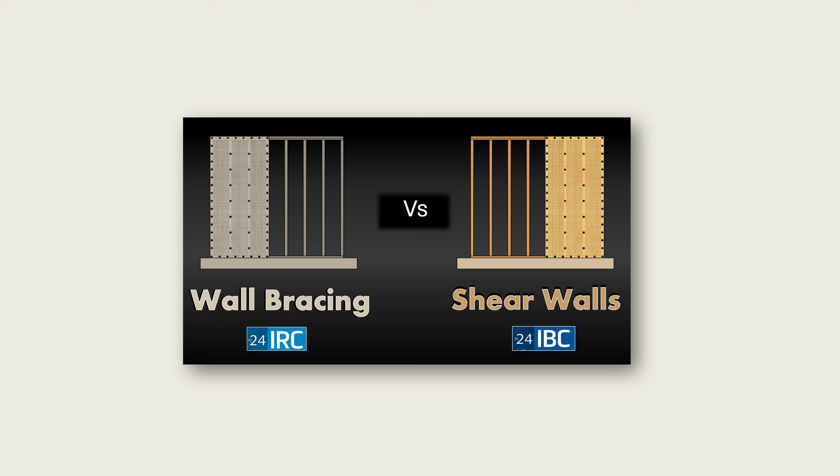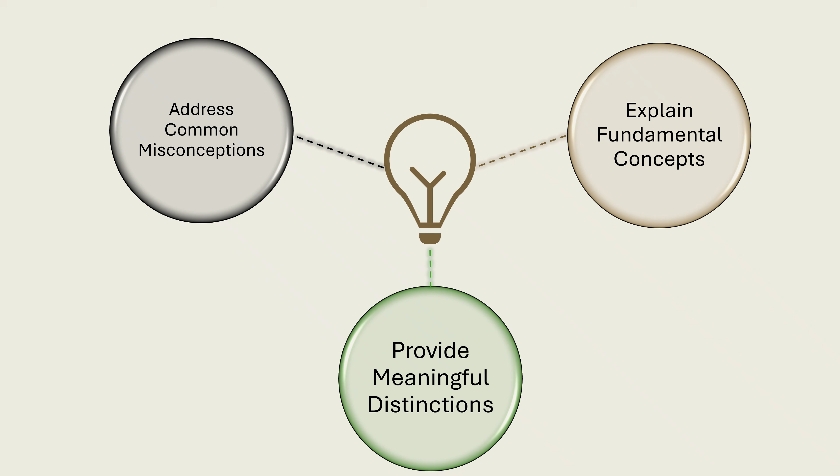This video is a thoughtful expansion on our previous video on wall bracing versus shear walls, which has received insightful feedback and important questions from viewers, highlighting the need for a more comprehensive explanation crafted to reach a wider audience. Our goal is to revisit the topic and approach it in a more accessible way, addressing common misconceptions, explaining fundamental concepts, and providing meaningful distinctions between braced walls and shear walls, both in principle and in application.

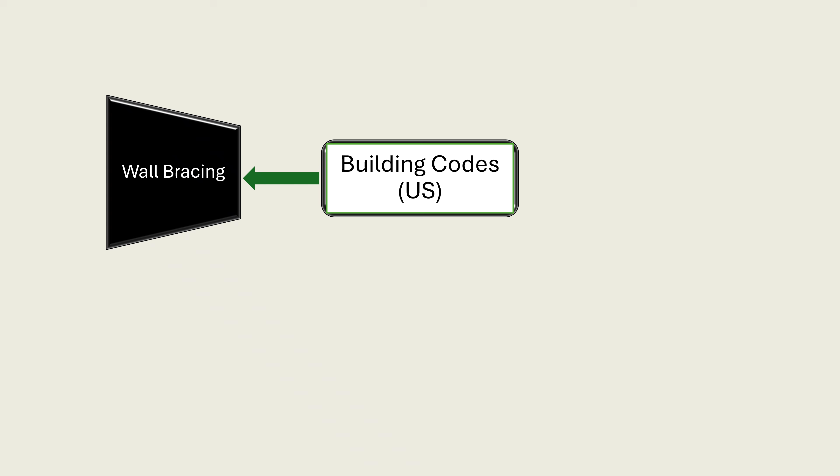In modern building codes adopted in most U.S. jurisdictions, the term wall bracing is almost exclusively used in light frame wood construction. However, the term shear wall is used for light frame wood construction, cold-formed steel, concrete, and masonry construction. Since it would not make sense to compare light frame wood-braced walls with concrete shear walls, we will restrict our discussion to light frame wood construction.

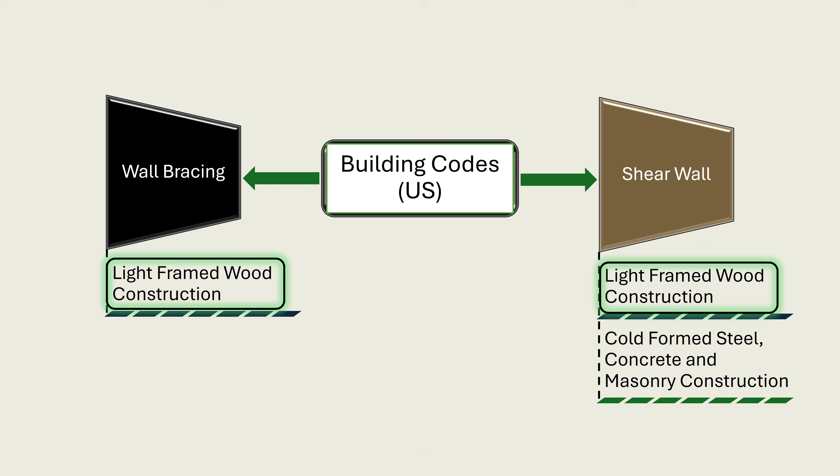The design of any residential structure begins with the architectural layout of the floor and the roof. The structural design is built on the architectural layout and is intended to provide the means by which framing members will resist the loads that they will be exposed to. For a typical residential structure, these loads may be broadly classified into two groups.

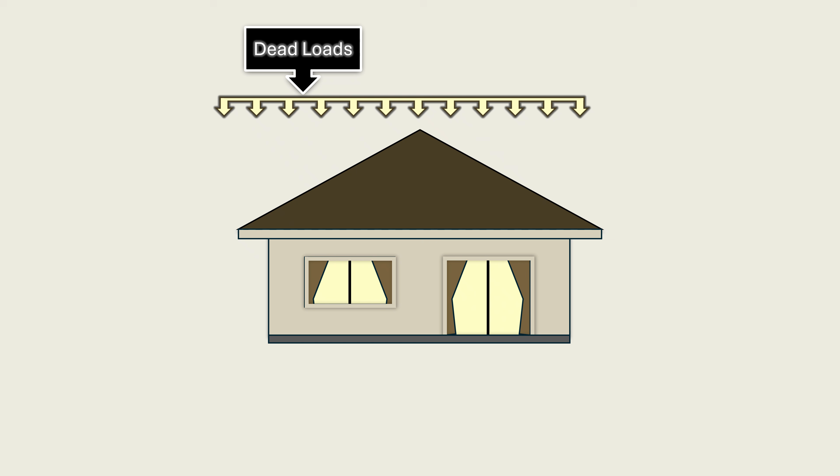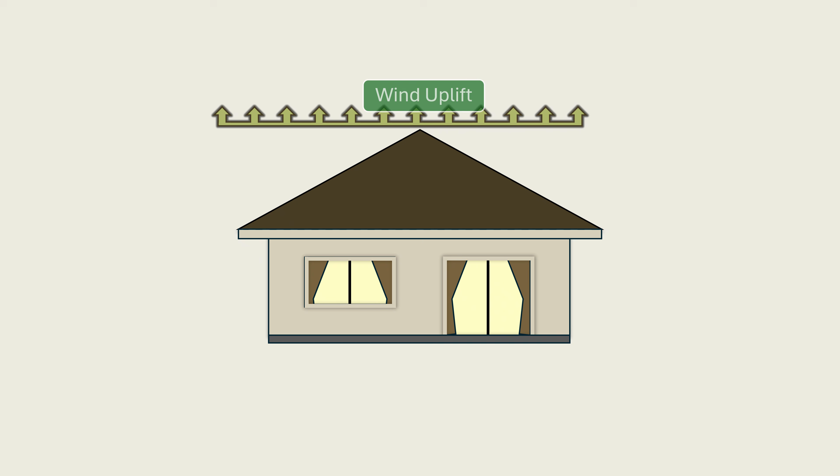The first group consists of vertical loads. These are loads that act primarily vertically downwards. Typical vertical loads include dead loads, which is the weight of the building materials, and live loads, which is the weight of the occupants, furniture, and other non-permanent elements in a building. Other vertical loads include wind uplift loads, which act vertically upwards and develop at the roof when internal pressures are higher than external pressures.

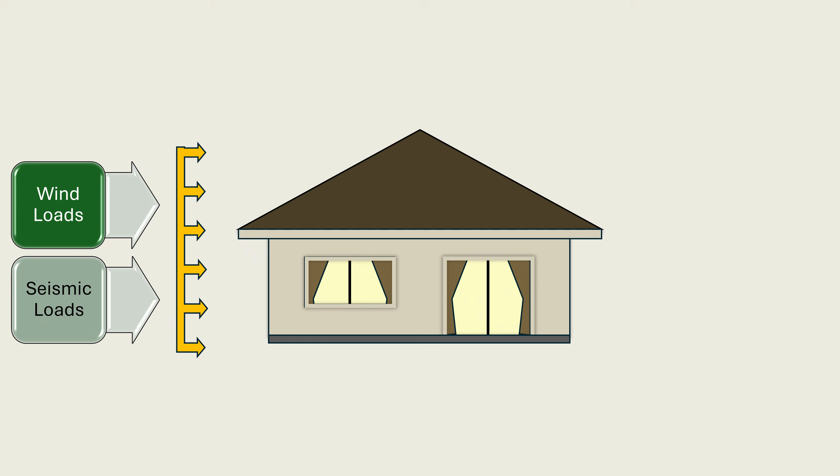The second group are lateral loads. These are loads that act laterally on a building and include seismic loads and wind loads. Other lateral loads include soil loads, which are resisted by retaining walls. As we shall see, both shear walls and braced walls are used to resist lateral loads such as seismic loads and wind loads.

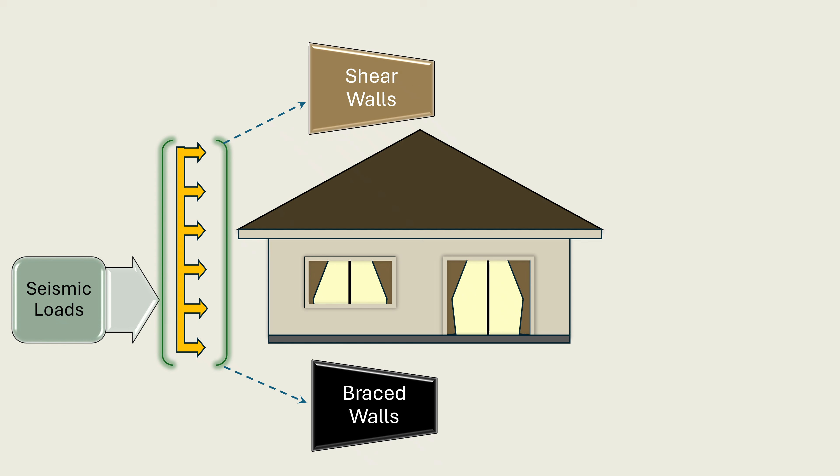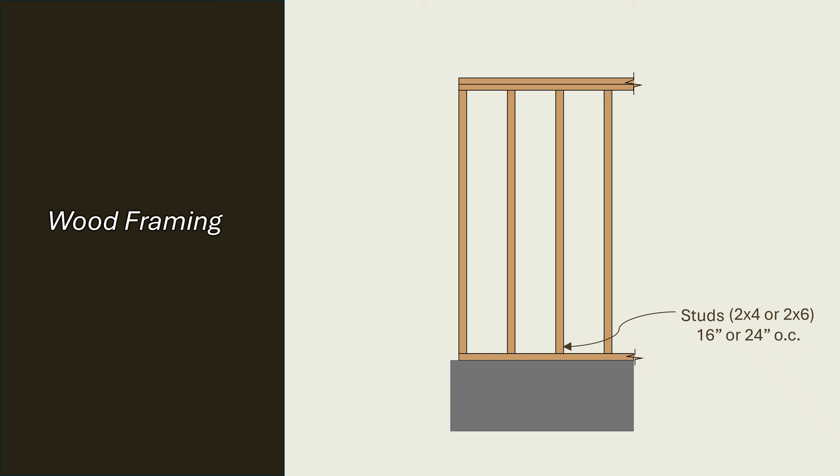In order to understand how shear walls and braced walls resist lateral loads, let us look at their physical makeup. In wood framing, braced walls and shear walls consist of several primary components. First, we have the wood framework of the wall. This will typically consist of 2x4 or 2x6 wood studs spaced at 16 inches on center or 24 inches on center. The next item is the stiff material that is attached to the wall studs.

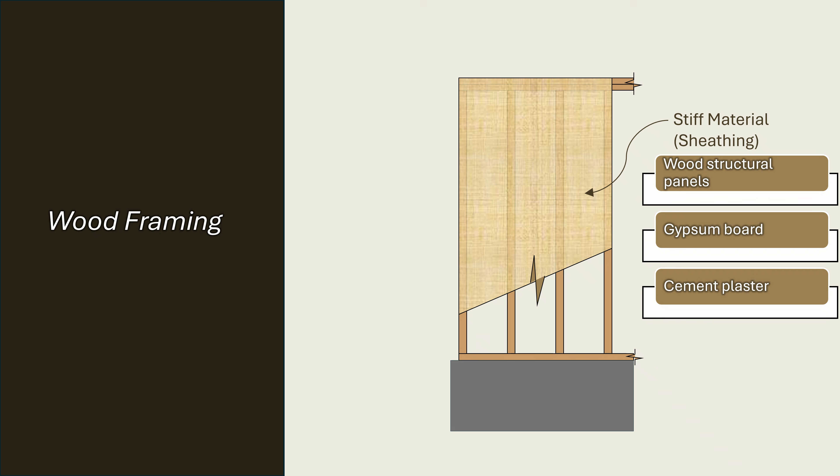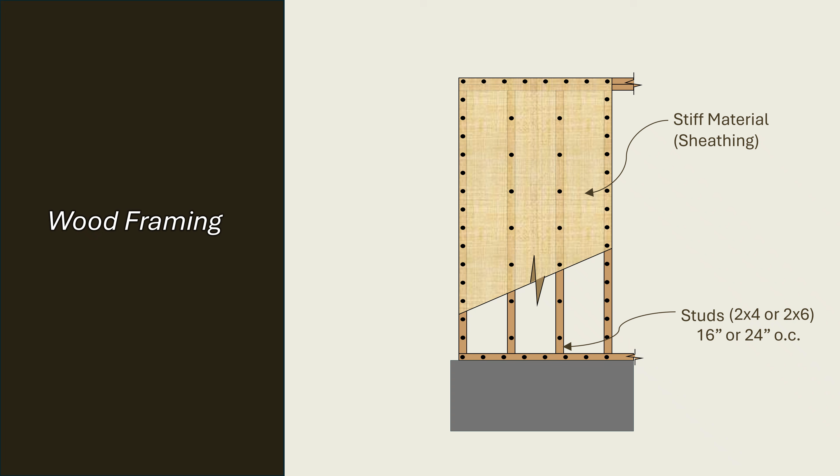Stiff materials that are used include wood structural panels, gypsum board, cement plaster, structural fiberboard sheathing, or particle board sheathing. Thirdly, we have the nails or screws that attach the stiff materials to the wood framework. These consist of edge nailing, which is nailing provided along the boundaries, and field nailing, which is nailing provided on the interior portions to attach the sheathing to the stud.

The fourth primary component is the anchor bolts at the sill plate. These are provided to attach the wall to the foundations to ensure that the wall is not displaced by lateral loads. Other components that occur in some shear walls and braced walls include holdowns at the end members and steel straps at the corners of openings. Holdowns prevent overturning of shear walls and braced walls, and are only used on selected shear walls and braced walls that are likely to have significant overturning demands.

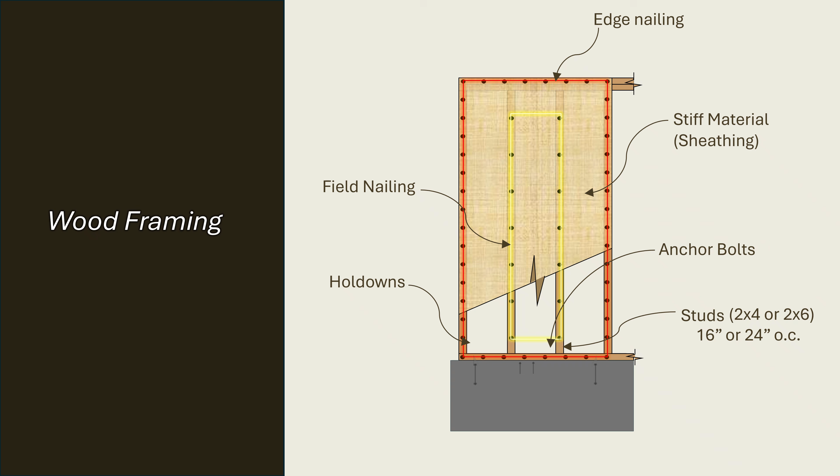These are the structural components of both shear walls and braced walls.

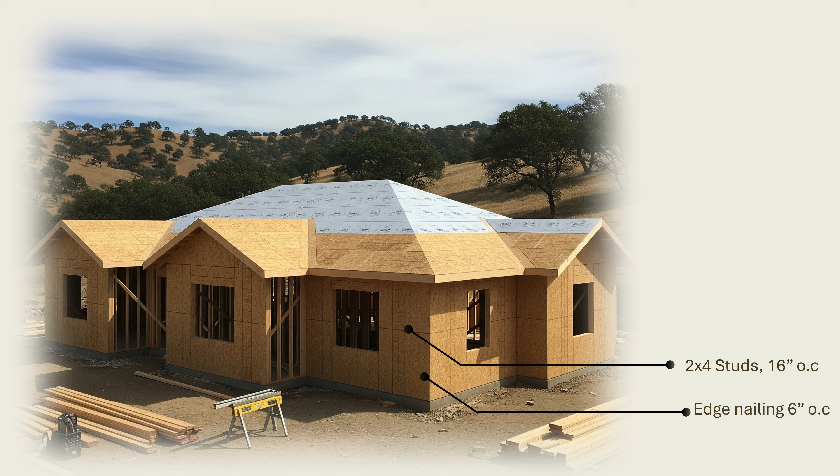Let us pause for a moment and explore the similarities between these systems. If you went to the construction site of a single-family home and looked at one of the wall segments that is at least 4 feet in length with 2x4 studs at 16 inches on center and wood structural panels with edge nailing at 6 inches on center, you would not be able to know if it is a shear wall or braced wall. This similarity is not limited to wood structural panels.

Both shear walls and braced walls can be sheathed with gypsum board, cement plaster, structural fiberboard sheathing, or particle board sheathing. What if the wood structural panel shear wall had edge nailing at 4 inches on center instead of 6 inches on center and also had holdowns? Again, this could be a shear wall or a braced wall.

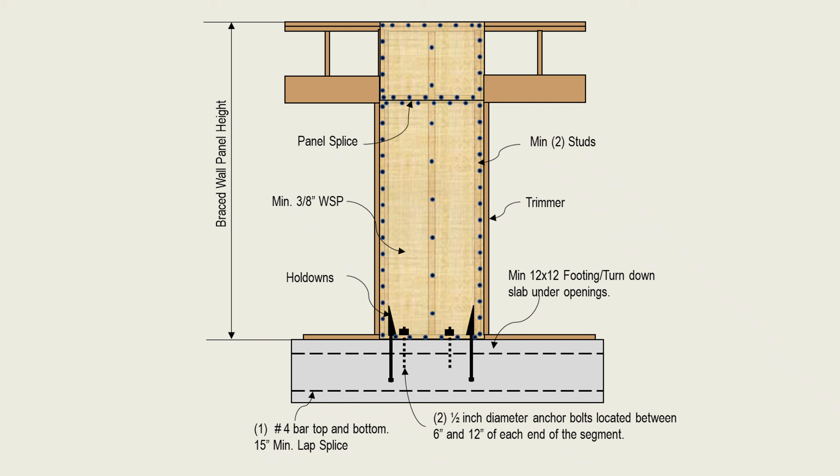Braced wall methods such as alternate braced walls, also known as method ABW, require holdowns and also require nailing at 4 inches on center when used at the first story of a 2-story building. Additionally, even for braced wall methods that require minimum edge nailing at 6 inches on center, a conservative nailing at 4 inches on center applied uniformly along with holdowns would likely not be prohibited.

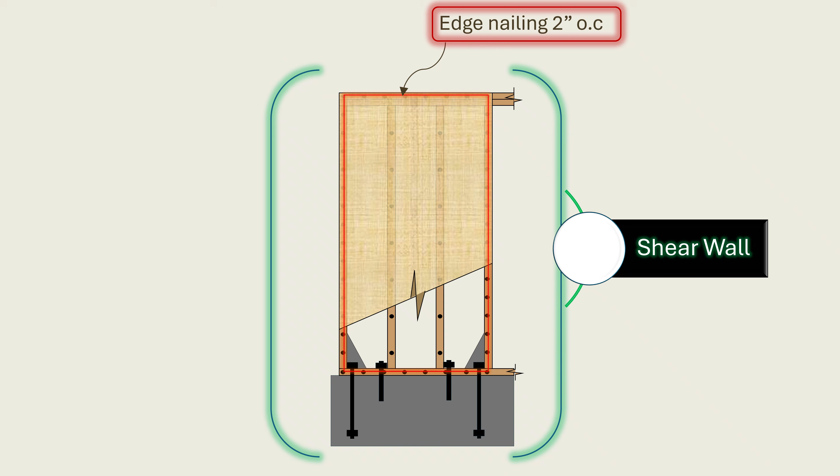What if nailing was at 2 inches on center? Then there's a high chance this is a shear wall, not a braced wall. While edge nailing spaced at 2 inches on center may benefit overall building performance, using it for wall bracing prescribed to use minimum edge nailing at 6 inches on center does not benefit the wall bracing design process. Therefore, a wall bracing designer will likely use the nailing regimen described in the code, meaning that if you see edge nailing at 2 inches on center, this is likely a shear wall.

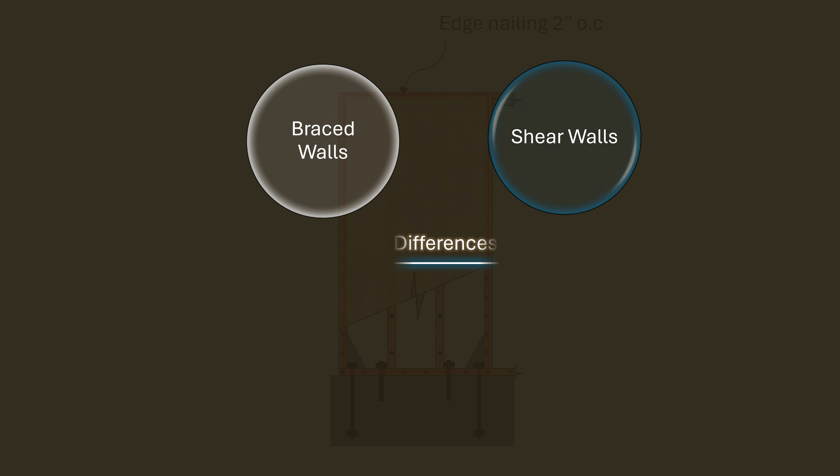When considering nailing requirements and length requirements, there is a point where shear walls begin to stand out from braced walls in terms of construction. However, any effort to distinguish them based on construction materials does not provide a reliable basis for classification. What we're saying is that the key differences between a braced wall and a shear wall are not captured by construction materials, but by the underlying principles that govern the lateral design of the building.

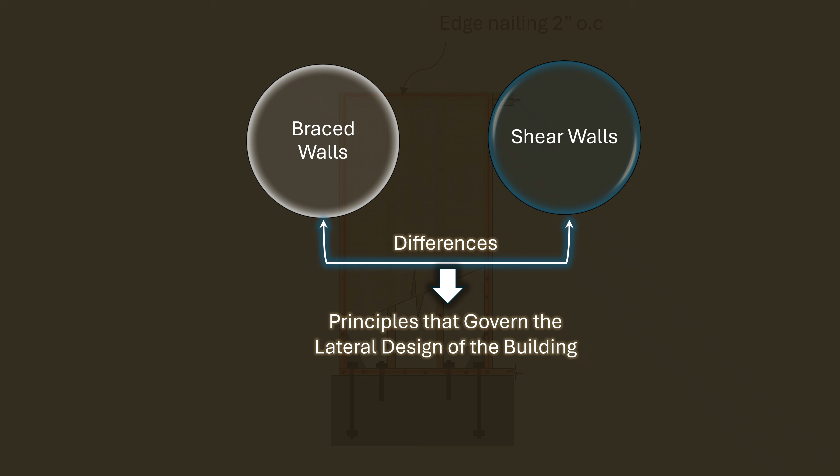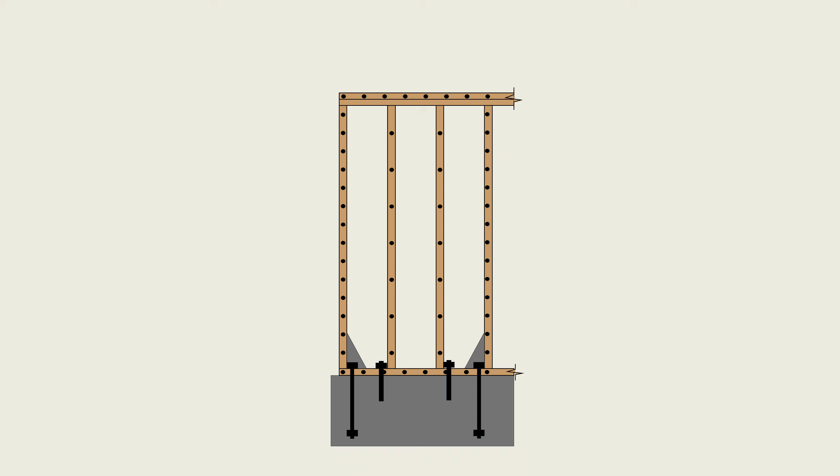In addition to having similar components, shear walls and braced walls perform the same essential function: they resist lateral loads caused by wind and earthquakes. Without any sheathing, a wood framework offers very little resistance to these forces, and even a small lateral load can cause the frame to rack or deform significantly. However, when stiff materials such as wood structural panels are attached to the frame, the system gains lateral strength and stiffness. This reinforcement enables both shear walls and braced walls to maintain the building's shape and stability under typical lateral loads throughout its lifetime. So at this fundamental level, the two systems are similar in makeup and function.

We're now ready to go into the principles and frameworks that distinguish the two systems. When a designer begins the structural design of a wood-framed residential structure to resist lateral loads, the first question is whether to use braced walls or shear walls. Choosing either option takes the design down a different path, where the outcome may be indistinguishable in terms of construction materials but have extreme differences in the overall layout of the system.

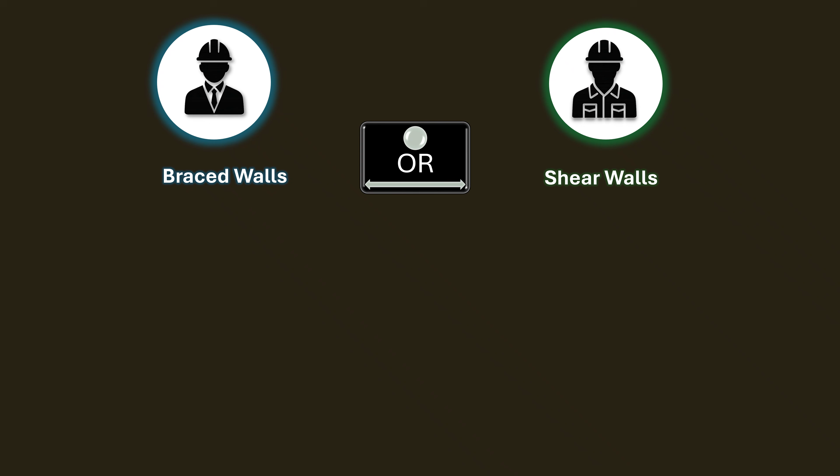Let's assume we have two independent designers. Designer A has decided to use braced walls, and Designer B has decided to use shear walls. Let's start with Designer A.

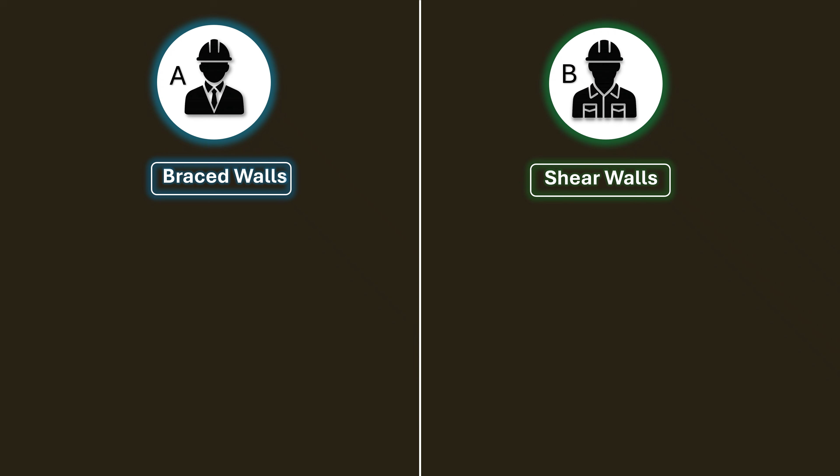The first implication of choosing braced walls is the requirement to use accepted conventional construction provisions for braced walls. The most recognized provisions are in the International Residential Code, or IRC, adopted in most US states. These provisions are found in Chapter 6 of the IRC, or local codes based on it. For example, a designer in California will use Chapter 6 of the California Residential Code, which is based on the IRC. If Designer A is familiar with the IRC's wall bracing provisions, and the structure isn't in a region where ultimate wind speeds and seismic hazard risk exceed the limitations for conventional construction, the designer can proceed with the braced wall design.

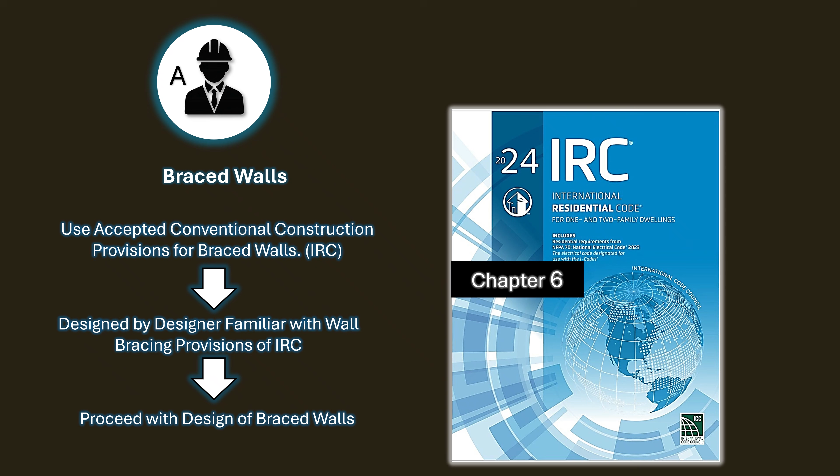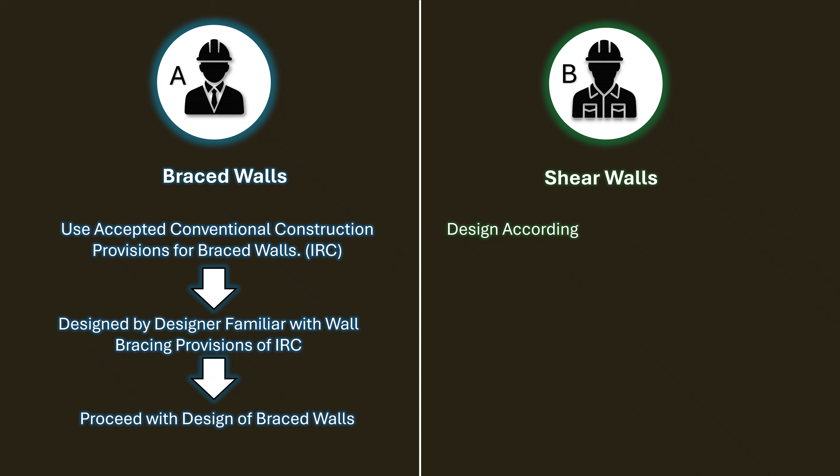Let's now consider Designer B, who opted to use shear walls. This choice implies the requirement to design the shear walls according to accepted engineering practice, based on the International Building Code, or IBC, or local codes based on it. A designer in California will use the California Building Code, or CBC, which is based on the IBC.

When the code says shear walls shall be designed according to accepted engineering practice, this means they must be designed by, or under the responsible charge of, a licensed civil engineer or architect. The design calculations and drawings must be stamped and signed by an engineer or architect. The implication is that if Designer B is not a licensed architect or engineer, they must hire one to design the shear walls.

So from the outset we can see a clear distinction in the framework that directs the design process. Braced wall design is directed by the provisions in the IRC, while shear wall design is directed by the provisions of the IBC, which require design according to accepted engineering practice.

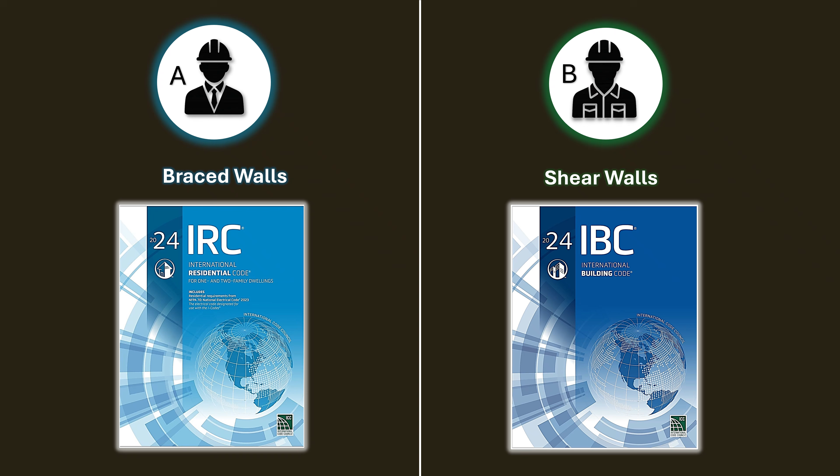The next step for designer A is to choose the bracing method or methods used to resist lateral loads. IRC wall bracing methods are essentially pre-engineered prescriptive systems, meaning they've been validated by engineering principles and testing and can be used without site-specific structural calculations, provided the building meets the IRC's scope. Bracing methods are largely distinguished by the sheathing materials used, the length of the bracing panels, and the extents of the bracing application.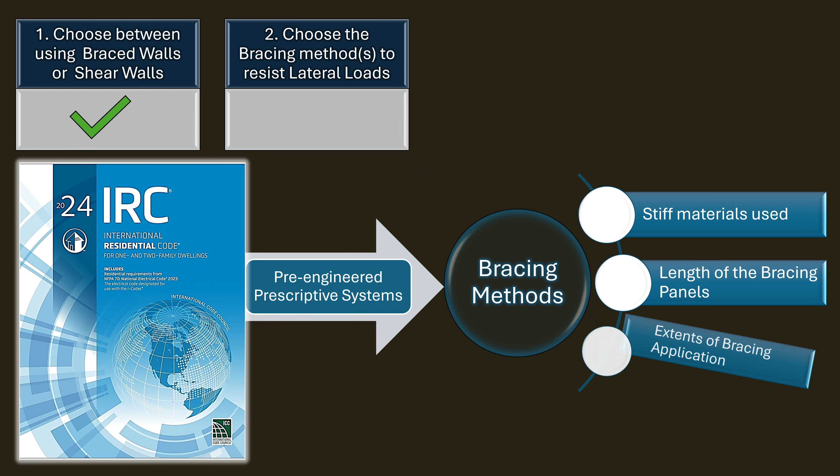The IRC provides 16 bracing methods, but we will focus on wood structural panel-based methods so that we can accurately compare them to wood shear walls, which are the most common types of shear walls.

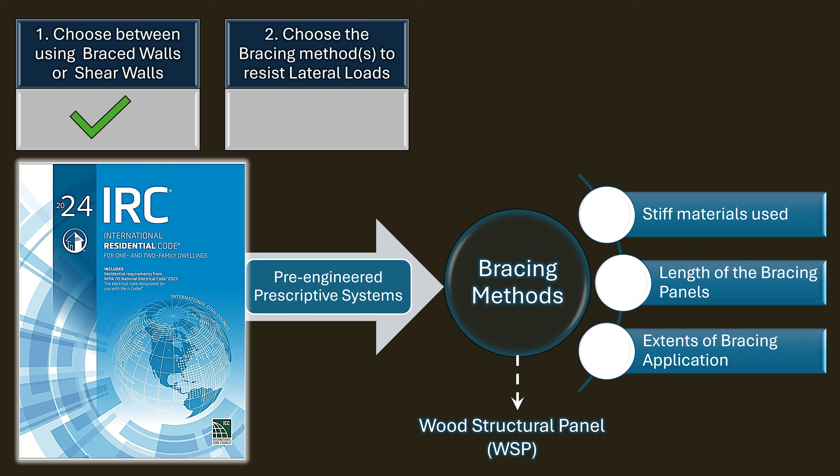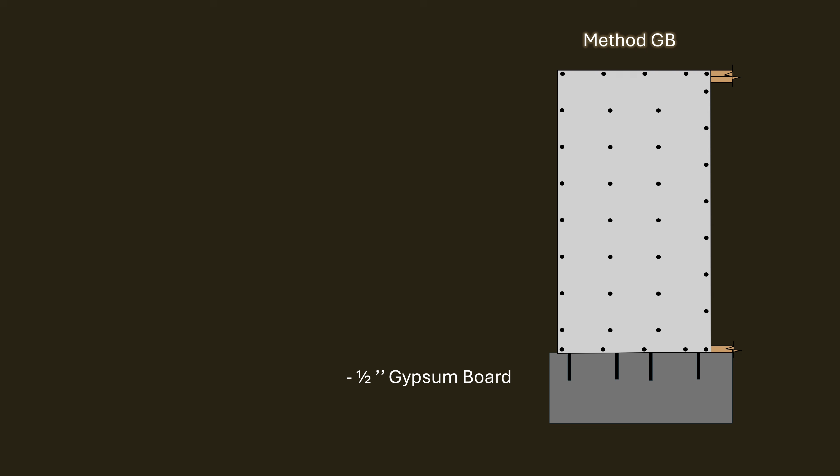One bracing method that does not use wood structural panels but is very common is method GB, which uses 1/2 inch thick gypsum board and nailing at 7 inches on center. Please note that the IBC, through reference standards for wood construction, also permits gypsum board shear walls, similar to method GB. Gypsum board shear walls do not offer equivalent strength and stiffness to wood structural panel shear walls, and most engineers prefer to use wood structural panels in design. Therefore, we will focus on bracing methods based on wood structural panels.

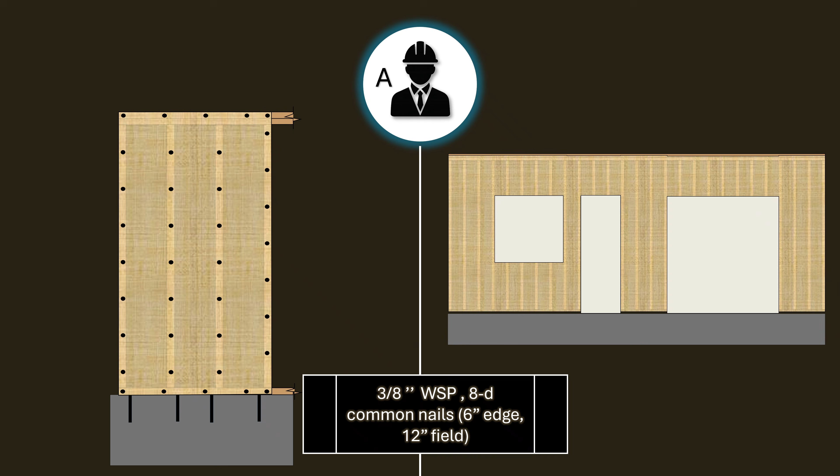The choice to use wood structural panels leads designer A to select between two options. The first option is method WSP, where WSP stands for wood structural panels, and the second option is the continuously sheathed WSP bracing method. Both methods utilize minimum 3/8 inch thick wood structural panels with 8-penny common nails spaced at 6 inches on the edges and 12 inches in the field.

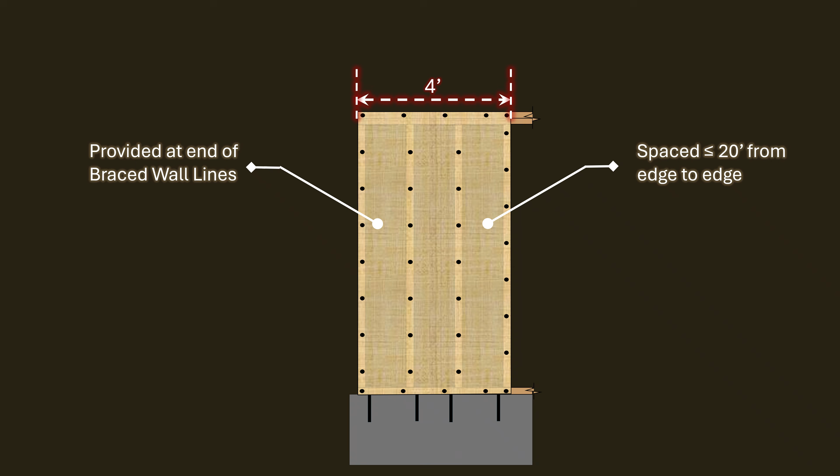Method WSP requires the designer to provide minimum 4-foot panels. Additionally, the code requires bracing panels to be spaced no more than 20 feet from edge to edge and to be provided at the end of braced wall lines, which are imaginary lines associated with the wall segments where bracing will be provided. For continuously sheathed WSP, the code requires the application of wood structural panels across the entire wall line, with a certain minimum length required adjacent to openings.

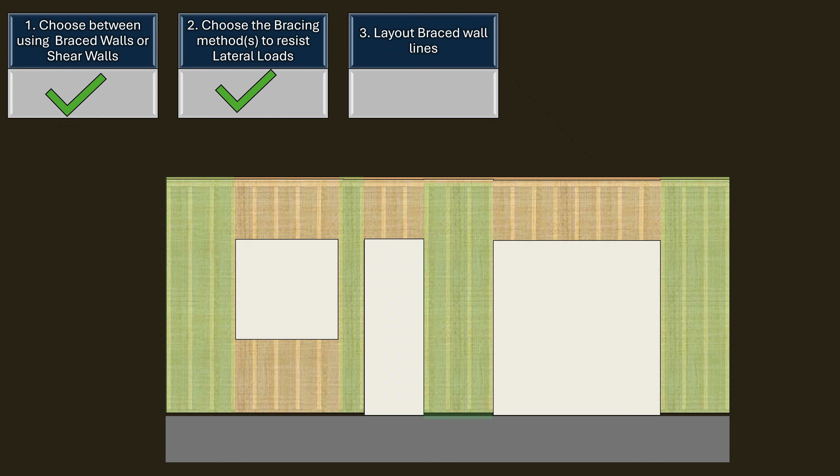Once the designer decides on the bracing method, the next step is to lay out the braced wall lines based on the rules of their placement, and then use their lengths and spacing to determine the amount of bracing needed from tables provided in the IRC. Therefore, we can see that the design of braced walls is based on rules or prescriptive guidelines that must be followed for the system to work as intended.

For demonstration, let us assume designer A wants to lay out the bracing in the structure shown. Let us assume they are using method WSP and that the building is in seismic design category D2, which is a high seismic area. The next step will be for the designer to lay out the braced wall lines.

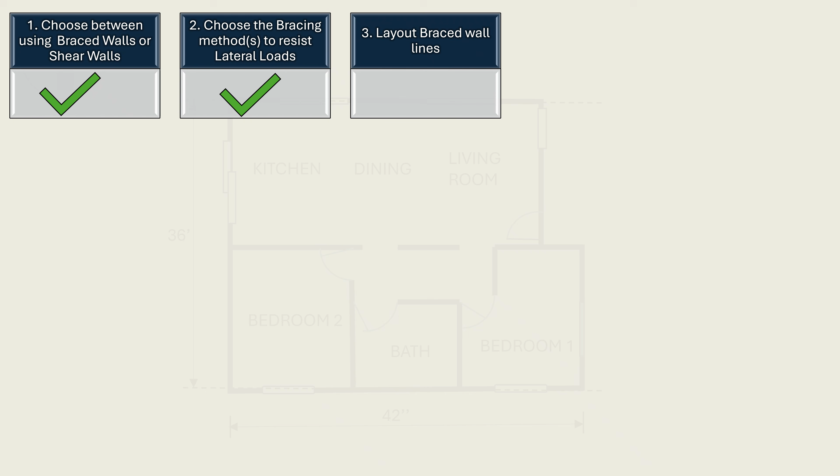Braced wall lines are imaginary lines drawn along the wall lines where bracing is intended to be provided. For this project, the IRC provides limitations on the placement of such braced wall lines. For a high seismic area such as seismic design category D2, the designer is limited to a braced wall line spacing of 25 feet, but may go up to 35 feet if conditions described in Table R602.10.1.3 of the International Residential Code are met.

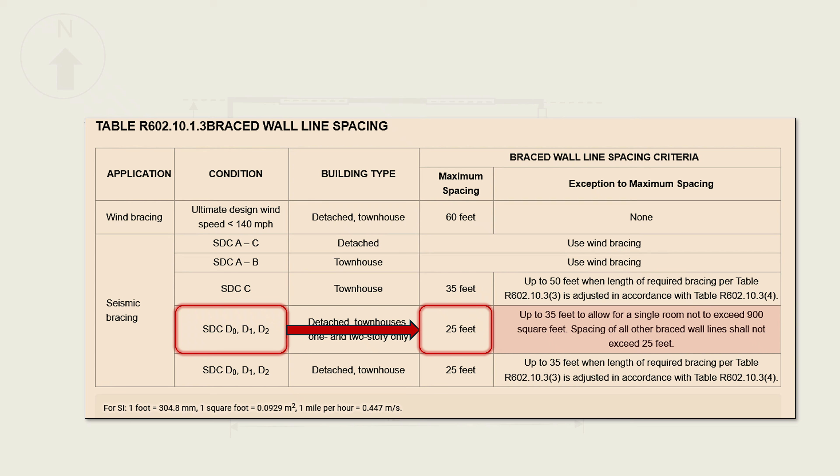Let us consider the north to south direction. Since braced walls track actual walls, the designer will first place the two braced walls shown. If a wall line has slightly offset segments, the braced wall line may be placed between them. Only wall panels that are not more than 4 feet from the braced wall line will count as part of that braced wall line.

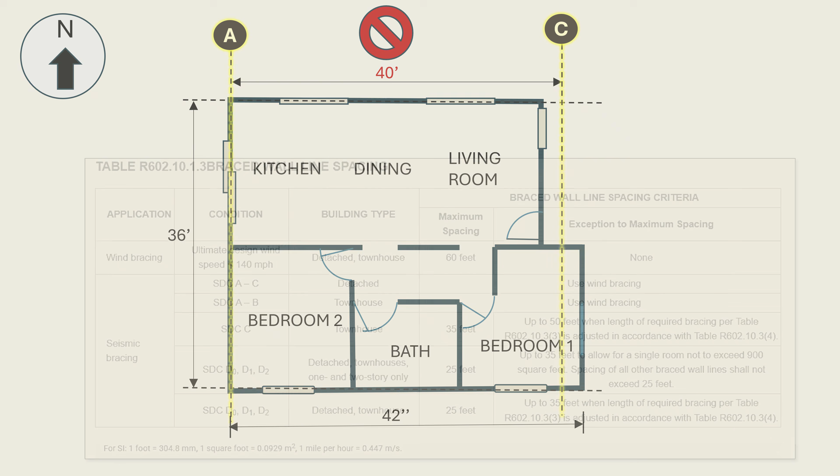The two braced wall lines are spaced at 40 feet apart. This is not permitted. According to the bracing rules in the International Residential Code, the spacing of braced wall lines in a high seismic area is limited to 25 feet, but may go up to 35 feet under certain conditions. The designer must therefore place another interior braced wall line so that the maximum spacing will not exceed 25 feet, or 35 feet under certain conditions.

At this point, the designer is facing another problem. The code requires bracing at the end of a braced wall line, or at no more than 10 feet from the end of a braced wall line if certain conditions are met. Therefore, if an interior braced wall line is to be provided, a physical wall must start not more than 10 feet away.

In this case, the designer provides braced wall line B and then provides a short wall segment at the dining area to ensure that the requirement for providing bracing not more than 10 feet from the end of a braced wall line is met. This means the wall at bedroom 2 and the new wall at the dining area will now be considered for the application of bracing, and will also require continuous foundations if the project has a slab on grade. The new wall means the designer has altered the original intent in order to satisfy wall bracing requirements.

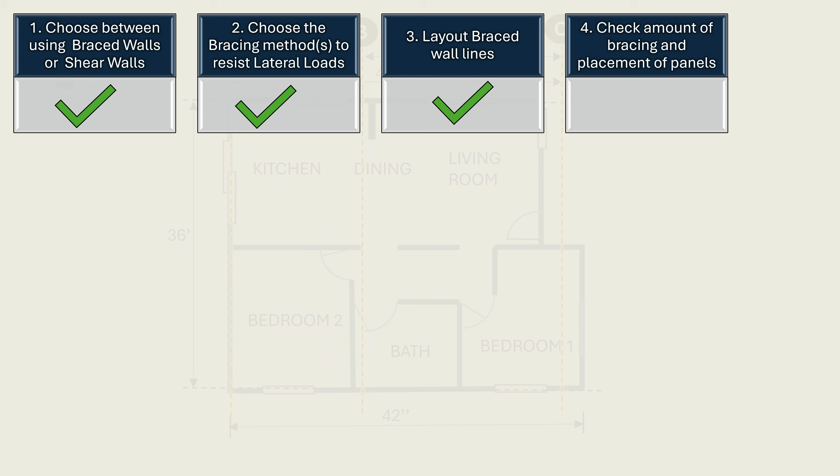The next step is to check the amount of bracing required and the placement of bracing panels on the braced wall lines. Let us assume that line A requires 4 feet of method WSP. This may be provided at the north corner as shown. However, the code requires a bracing panel at each end of the braced wall line, or requires the layout to meet certain requirements. Therefore, to satisfy this requirement, the designer proceeds to provide another panel at the south end of line A as shown. The code also requires bracing panels not more than 20 feet apart.

The two panels are clearly more than 20 feet apart. Therefore, the designer provides a middle 4-foot panel to meet this 20-foot spacing limit requirement. Please note that for method WSP, the panels have to be 4 feet in minimum length. This means the panels can be more than 4 feet.

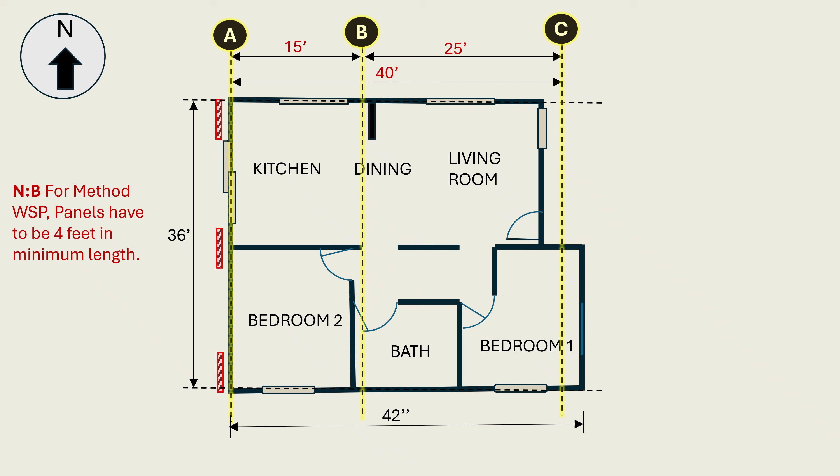The designer will do the same at line B, where they may need to add another wall panel if the spacing between the north and south segment exceeds 20 feet.

At line C, the design shows a window opening at the north corner. The code requires a braced wall panel at the end of the braced wall line, but provides exceptions if certain conditions and requirements are met. Therefore, the designer will need to evaluate the rules, the exceptions, and the design. If the rules and exceptions cannot work with the current design, then the design may need to be altered.

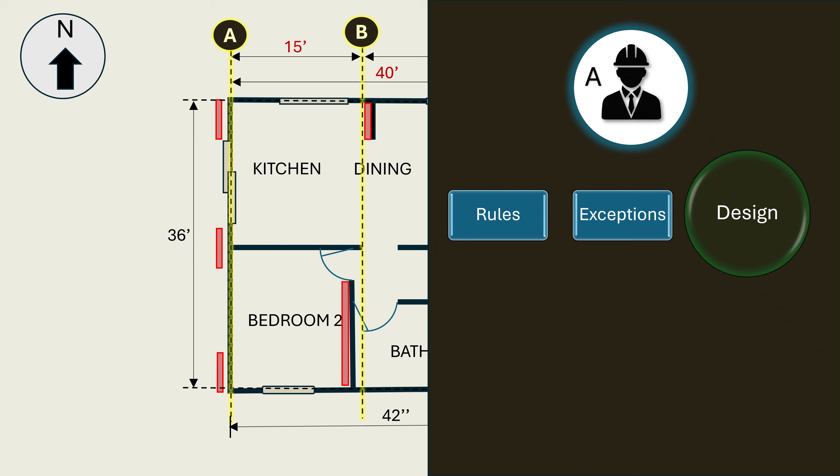This is the design framework within which designer A operates. The designer is confined by a set of rules that mark a rigid boundary that cannot be crossed. In some cases, this may result in an increase in construction cost, as more structural elements may be needed to meet the rules, as we showed with the additional wall panels and foundations along line B. On the other hand, for simple regular structures, this approach is fairly simpler to execute and more economical, since it does not require design calculations or a licensed design professional such as a civil engineer or architect.

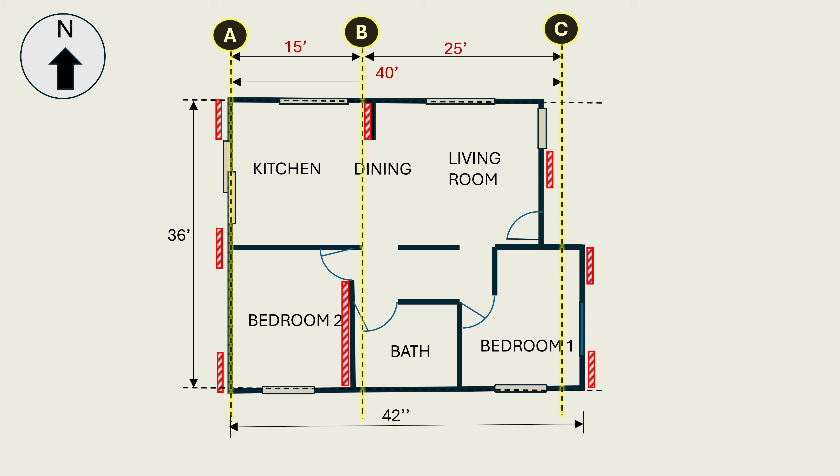We have only considered bracing in the north-to-south direction. For this project, the designer will also need to consider bracing in the east-west direction. Please note that our goal in this video is to draw contrasts between shear walls and braced walls, and not to provide an exhaustive lesson on wall bracing.

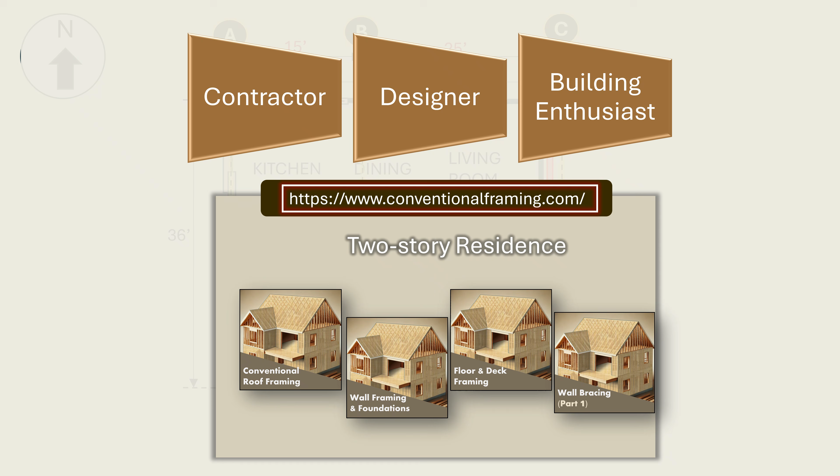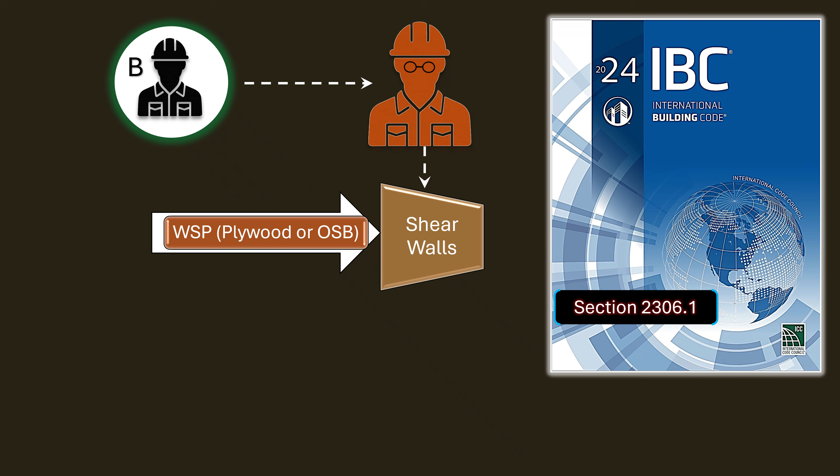Designer B, on the other hand, decided to hire an engineer. Since this is a wood-framed structure, the engineer decides to use shear walls with wood structural panels such as plywood or OSB. An engineered design is based on the requirements of the IBC, which references other more specialized standards for wood construction. The IBC in Section 2306.1 references several standards, including the American Wood Council's Special Design Provisions for Wind and Seismic, which is the primary standard used in the design of wood shear walls by most engineers.

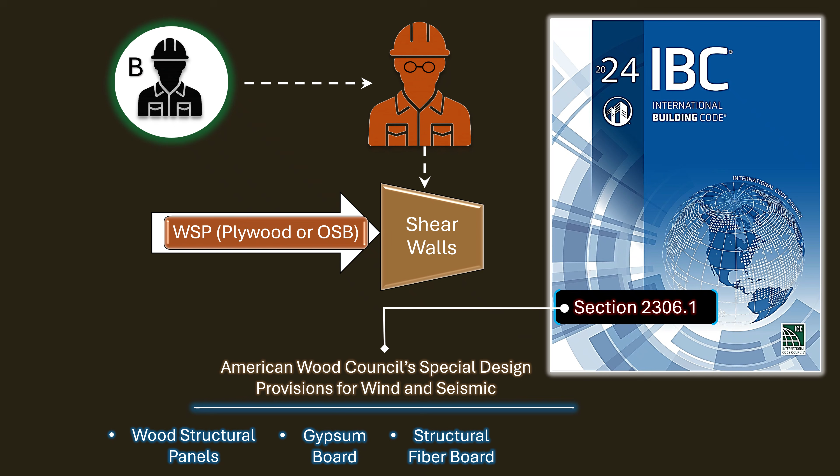This standard provides the nominal capacities of various shear wall systems, including shear walls with wood structural panels, gypsum board, structural fiberboard, and cement plaster. After deciding to use wood structural panel shear walls, the next step is for the engineer to calculate the total seismic design force acting on the building. This is known as the base shear. The engineer will also calculate the total wind force acting on the structure and base the final design on the highest loads.

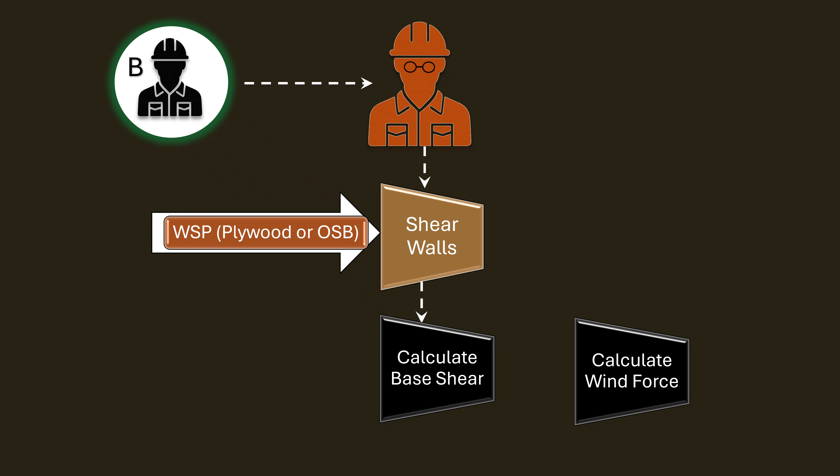If the total base shear determined for this building is 3,000 pounds, this force will be applied in the north-south direction as well as the east-west direction.

For the north-south direction, the engineer may use line A and line C. There is no limitation placed on an engineered design as far as the spacing of the lines of resistance. This is a major difference between wall bracing design and shear wall design, and it is one of the core advantages of engineering over prescriptive design. For the most part, the engineer can work with the original layout without needing to introduce new lines of resistance and new wall segments as we saw with prescriptive non-engineered design of braced walls.

If the base shear is 3,000 pounds, line A will take half this load, which is 1,500 pounds, and line C will take the other half. The engineer then takes the capacity of the shear walls from the special design provisions for wind and seismic and uses it to determine the length needed.

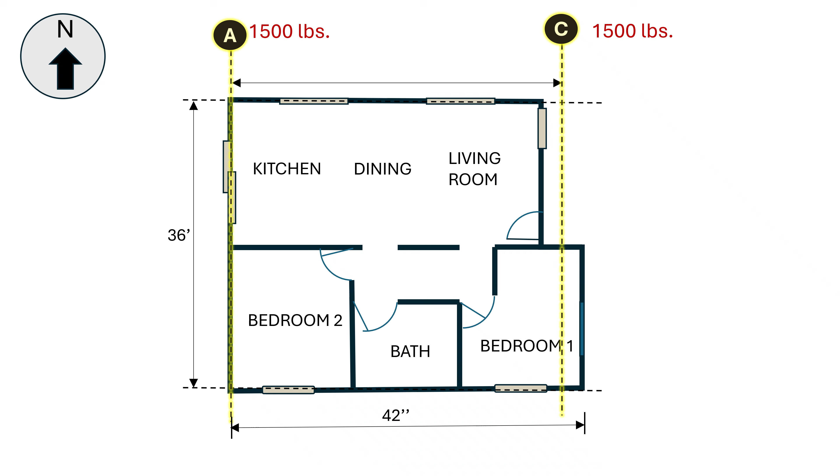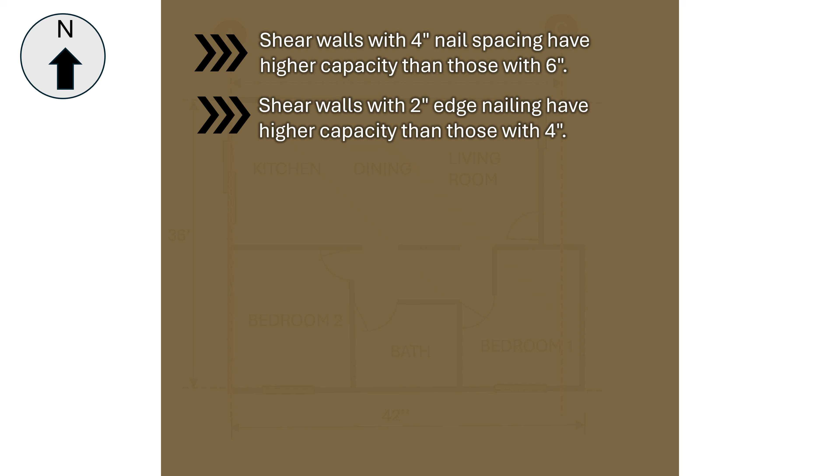This standard provides the engineer access to different capacities based on the spacing of nailing. A shear wall with 8 penny common nails spaced at 4 inches on center at the edges will have a higher capacity compared to a shear wall with nails spaced at 6 inches on center. Similarly, a shear wall with edge nailing at 2 inches on center has a higher capacity than a shear wall with nailing at 4 inches on center.

Therefore, whereas wall bracing using method WSP is restricted to wall bracing with edge nailing at 6 inches on center, an engineer designing shear walls has access to higher capacities for the same length by using tighter nailing.

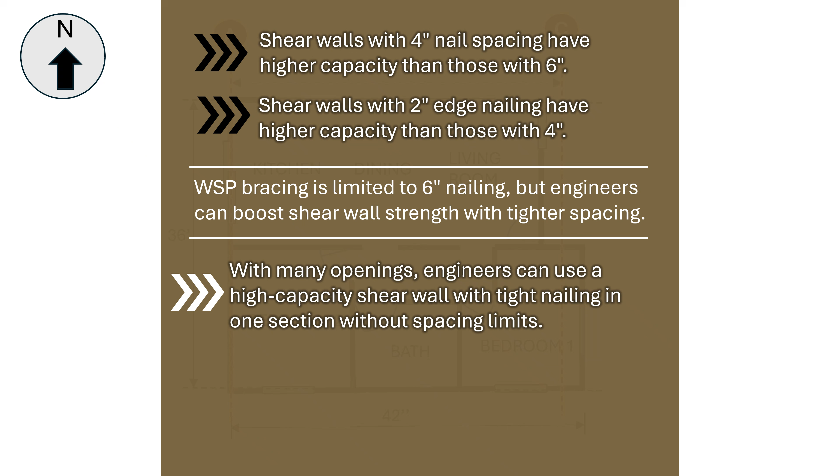If a wall line has a lot of openings and minimal fully framed segments for shear walls, the engineer can use a high-capacity shear wall with tight nail spacing on one section of the wall line and is not limited by spacing rules between shear walls. The engineer is also not required to provide a minimum number of shear walls within a given line or at particular locations. This provides the engineer with greater flexibility to customize the design to align with the architectural concept.

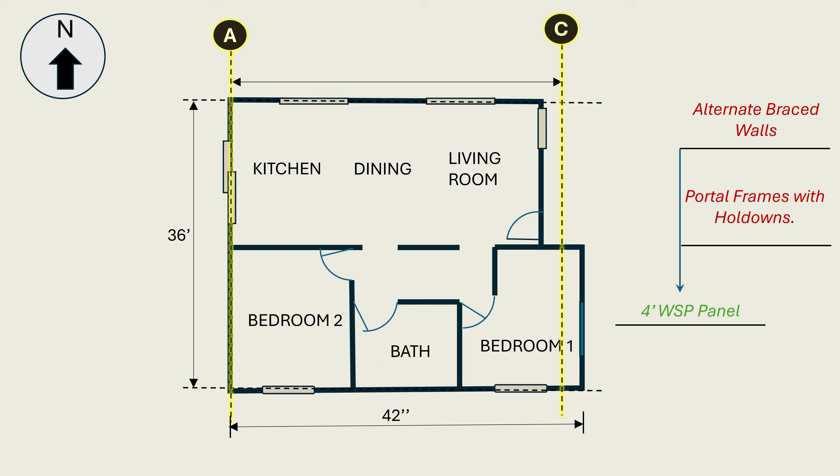We must mention that there are bracing methods that allow for shorter length of braced walls with tighter nailing, such as alternate braced walls and portal frames with holdowns. However, these bracing methods are limited to providing an equivalent strength to a 4-foot method WSP panel and are still required to comply with the same spacing rules and location requirements.

For the layout that we are considering, the engineer may decide to use only one 4-foot panel with edge nailing at 4 inches on center, and that will be sufficient. Such a shear wall will also need holdowns to prevent overturning.

We must mention here that the engineer is not required to provide a shear wall along line A. The engineer may decide to use the wall segment at the left side of bedroom 2 and design the system to deliver the forces to this location. In this case, the north-south forces will be resisted by the shear wall at bedroom 2 and another shear wall at bedroom 1 or the living room area.

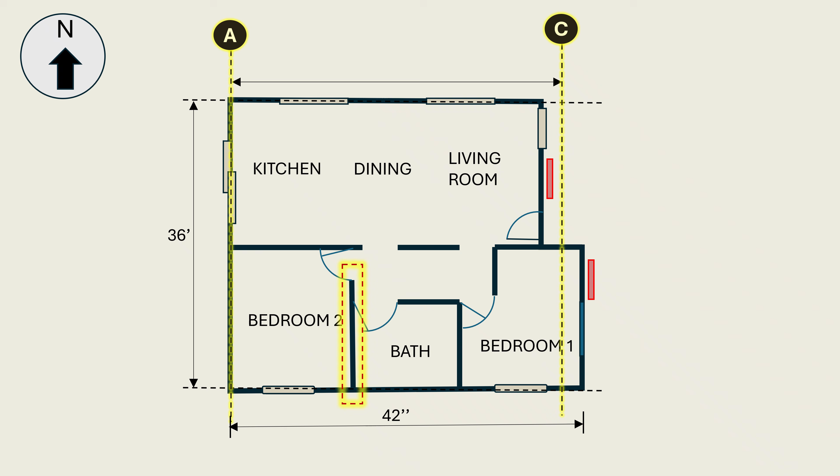The engineer is only limited by his or her ability to justify the intent of his or her design using accepted engineering methods. On the contrary, for wall bracing, the designer is limited by the prescriptive rules and guidelines that govern the wall bracing design process. That being said, a designer with a thorough knowledge of the wall bracing design process will be able to exercise a lot of creativity even within the limitations that describe the wall bracing process.

While we have illustrated some of the core differences in the design of braced walls versus shear walls, there remain critical distinctions worth expanding upon. There are some that were touched on but merit deeper exploration, and others that are more nuanced and may not have been directly captured in our discussion so far.

Together, these differences speak to where and how each system can be used, with significant implications for architectural flexibility, code compliance, and overall building performance. One of the most notable differences lies in the flexibility of layout and architectural freedom.

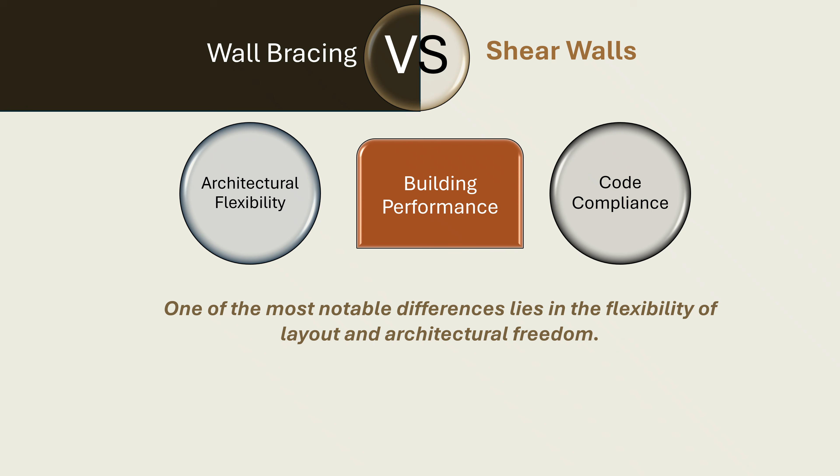We have demonstrated this difference in the example that we have looked at. Wall bracing, as prescribed in the IRC, tends to favor more compartmentalized layouts. It requires a minimum amount of bracing distributed along multiple wall lines, and this usually translates to more solid wall segments throughout the structure. As a result, designs that rely heavily on open concept spaces or large window openings often struggle to meet IRC bracing requirements without added walls or adjustments to the floor plan.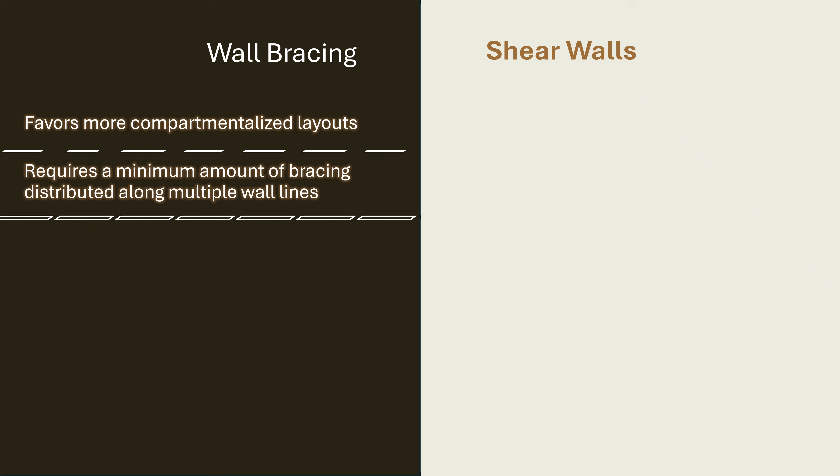In contrast, engineered shear wall systems designed under the IBC offer far greater flexibility. Because they are tailored to specific loads and conditions, shear walls can be strategically concentrated in fewer locations. This allows designers to preserve large openings, accommodate unconventional geometries, and pursue more ambitious architectural ideas without compromising structural integrity. This becomes especially valuable during additions or alterations, where targeted structural reinforcement can reduce the need for extensive modifications throughout the building. On the contrary, this is much harder to achieve under the prescriptive braced wall provisions of the IRC, which rely on more uniformly distributed resistance and stricter alignment with braced wall lines.

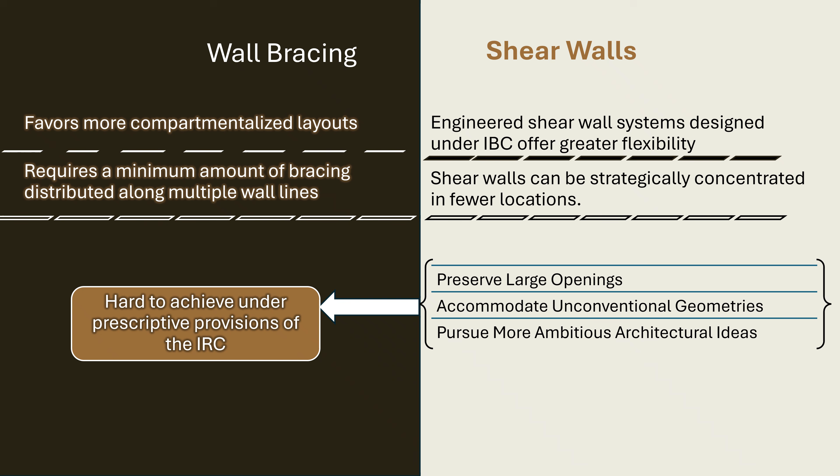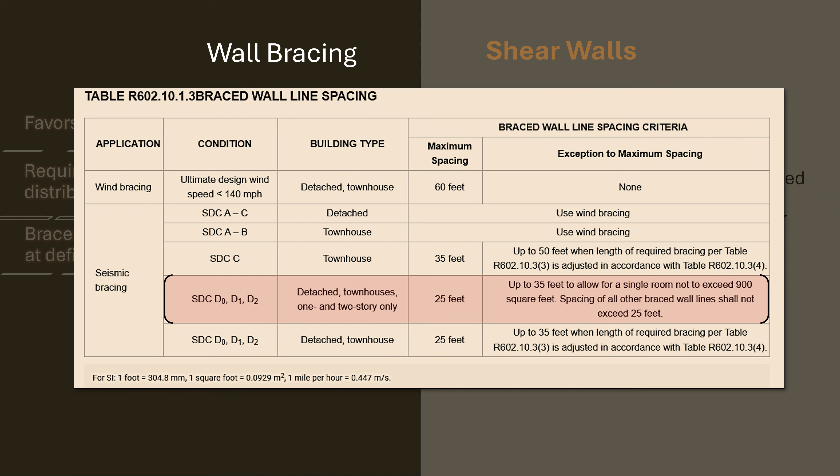Closely related to this is the issue of regular geometry and spacing rules. IRC bracing depends on the concept of braced wall lines, which must be provided at defined intervals. As we have shown in the example, the code typically limits the spacing between these lines to 25 feet in high seismic areas, but the limit can go up to 35 feet under certain conditions. Additionally, each line must have enough braced panels distributed along it, with specific requirements for panel lengths and placement near ends of walls. These rules assume a certain regularity in building shape and layout, and they break down when buildings become more complex or irregular in form.

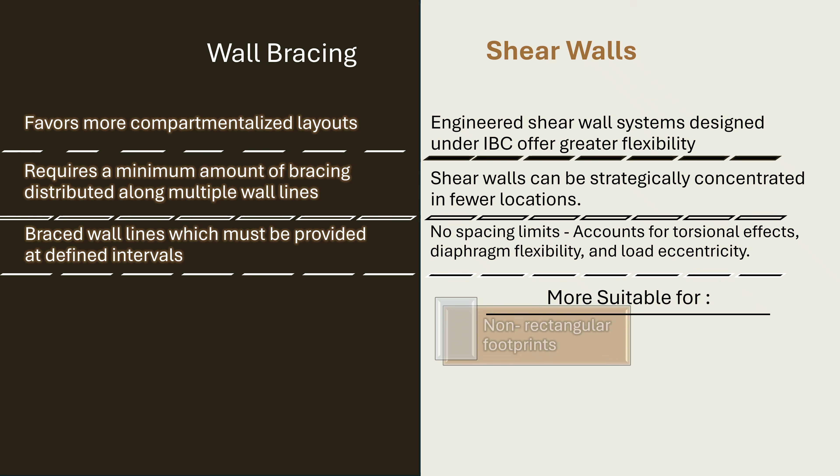On the other hand, engineered shear wall design is not bound by such rigid spacing criteria. It allows the engineer to assess the building as a whole, accounting for torsional effects, diaphragm flexibility, and load eccentricity. These are factors that fall outside the prescriptive approach of the IRC and are instead handled through engineering analysis. This makes shear wall design more suitable for buildings with non-rectangular footprints, offset wall lines, or varying story heights.

Another important distinction between the two systems is the overall limitations placed on wall bracing. The IRC bracing provisions are limited in scope. They apply only to detached 1- and 2-family dwellings and townhouses of up to 3 stories. As far as the loading is concerned, the provisions are also limited to wind speeds not exceeding 140 miles per hour and cannot be used in irregular buildings in very high seismic areas.

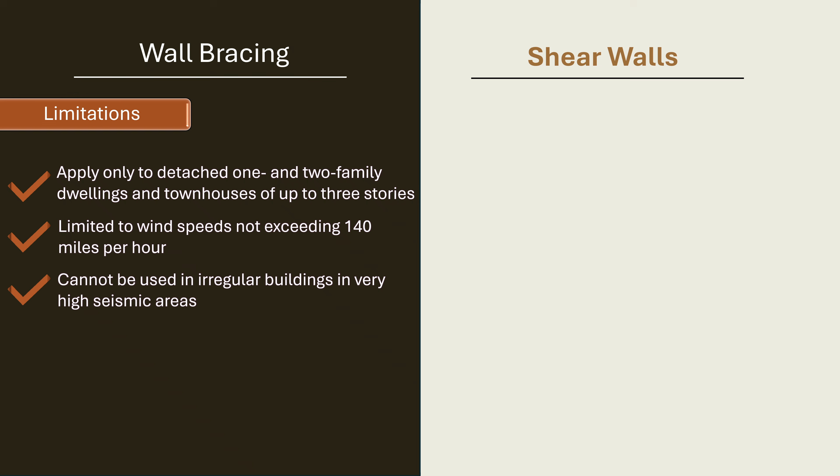In states like California, a 3-story building designed using braced walls needs to be stamped and signed by an engineer. If the same 3-story building is in seismic design category D2, then it must be designed according to accepted engineering practice. Use of wall bracing provisions also includes limitations on building heights, material weights, and is prohibited when the structure integrates concrete or masonry wall construction, with the exception of fireplaces, chimneys, and masonry veneer.

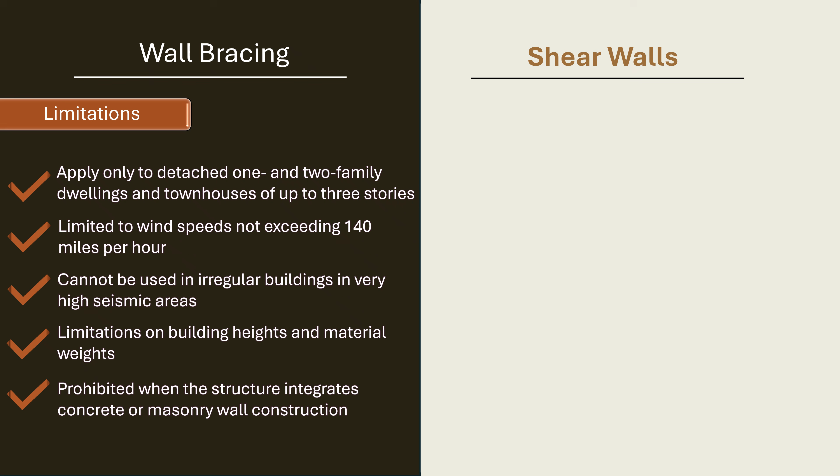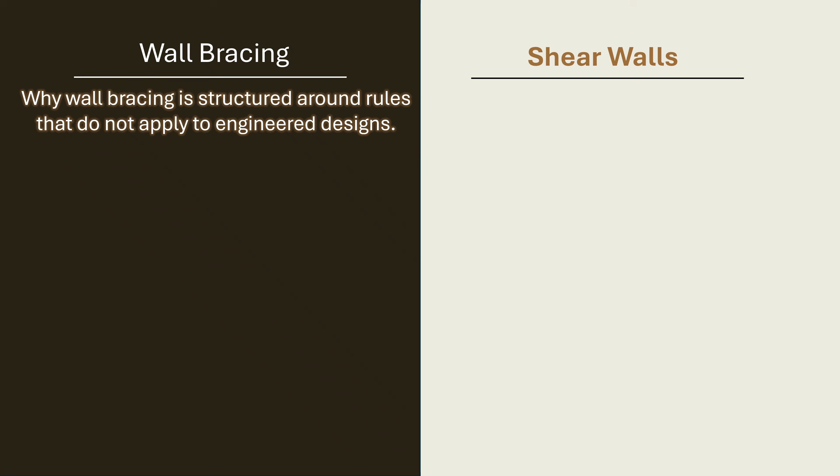We cannot conclude this video without discussing why wall bracing is structured around rules that do not apply to engineered designs. A key reason braced wall design under the IRC is governed by strict uniform rules that do not apply to shear wall design under the IBC lies in the fundamental difference between prescriptive and performance-based approaches. The IRC provides a prescriptive path intended for typical low-rise residential structures, enabling designers and builders to comply without performing structural calculations. To ensure adequate performance across a wide range of conditions, the code imposes standardized requirements on wall lengths, spacing of braced wall lines, allowable materials, and building geometry.

These rules are intentionally conservative and assume regular load paths, limited building height, and predictable loading conditions. In contrast, engineered shear wall design under the IBC follows a performance-based framework. The engineer of record evaluates the unique characteristics of the building, including geometry, openings, material properties, and applied loads, and designs the shear walls accordingly.

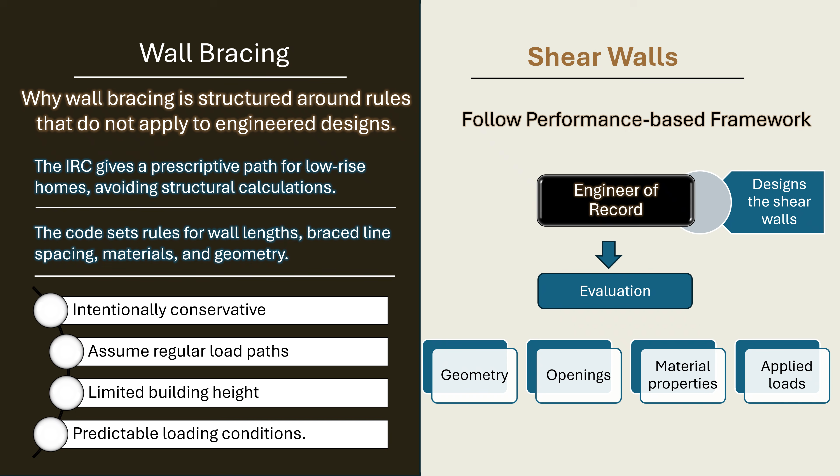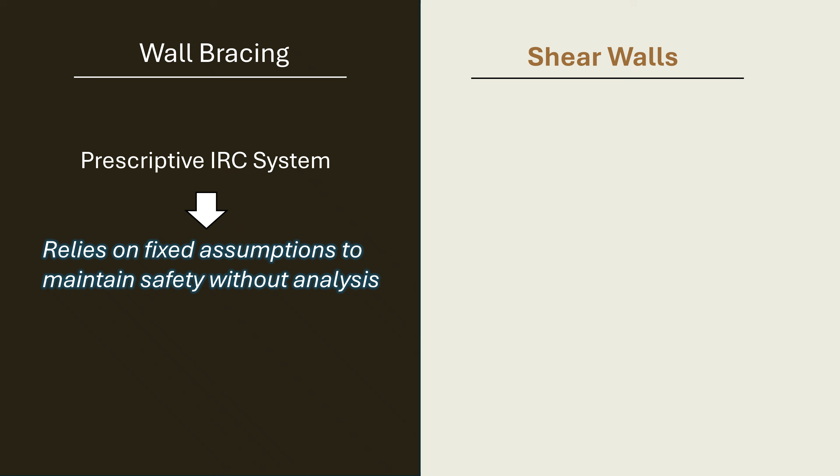This flexibility allows the design to adapt to more complex configurations, such as open floor plans or high-load regions, but it shifts the burden of ensuring structural adequacy from the code to the engineer. Simply put, the prescriptive IRC system relies on fixed assumptions to maintain safety without analysis, while engineered design offers greater freedom because it is supported by calculations that are tailored to the specific characteristics and needs of the building.